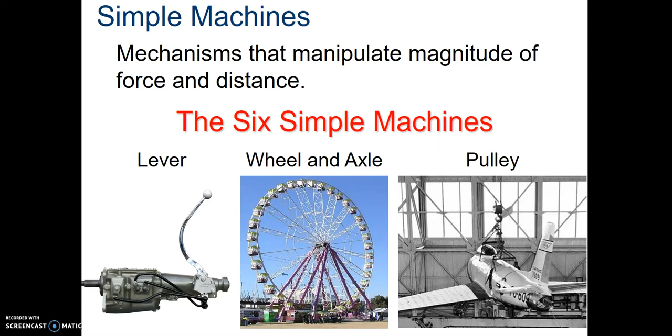There are 6 different types of simple machines. There's the lever, a wheel and axle, and a pulley, and there's also an inclined plane, a wedge, and a screw. Each one of these simple machines applies and has a mechanical advantage, the reason why we use them and what they do inside of a system.

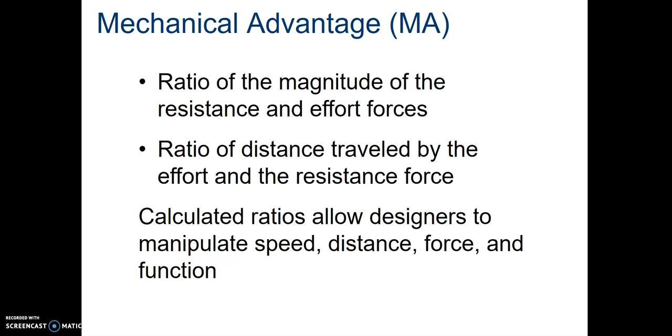Mechanical advantage itself is either a ratio of our forces or a ratio of the distances. So the ratio of the magnitude of the forces, how much force is being applied, so 10 pounds, 5 pounds, 20 pounds, 100 pounds, and then the distances, 5 inches, 10 inches, 20 inches, 30 feet, 50 yards, whatever we're looking at. And we use all of those different ratios to figure out how well a machine works and what we can do to edit and change it to get what we're trying to accomplish completed.

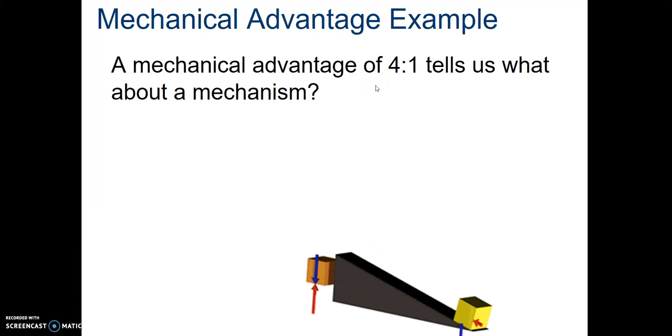So let's look at an example. Mechanical advantage is 4 to 1. What does that tell us about this mechanism or simple machine? Well, it tells us something about the forces. The force to push this box up this hill is 4 times less than the force it takes to lift this box straight up. So it takes less force to move it up if we push it across.

But what does it tell us about the distance? It tells us that this distance is 4 times bigger than the distance straight up and down. So it takes less force, but it takes a greater distance. And force and distance are talking about work.

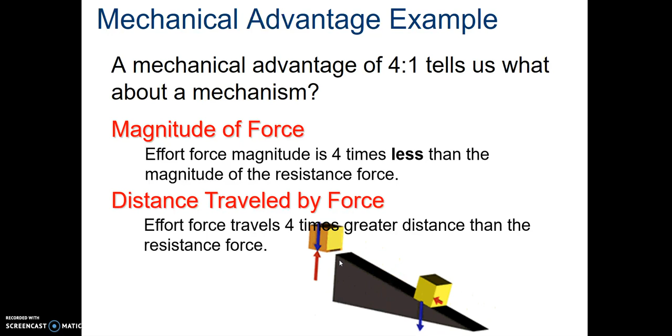Work is the force applied to an object times the distance it travels. So in order to move that box on the previous slide, we still needed the same amount of work whichever direction we took it, but it just meant what's our ratio of force to distance that we wanted to travel. So work is force times the parallel distance.

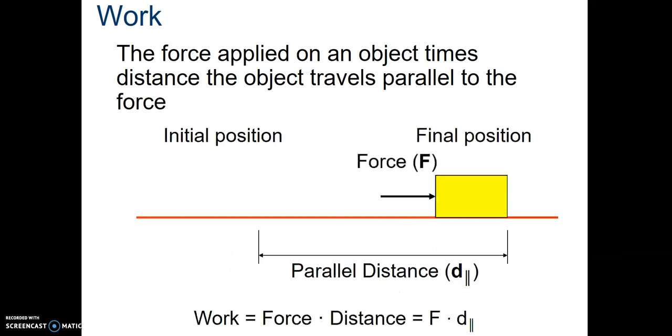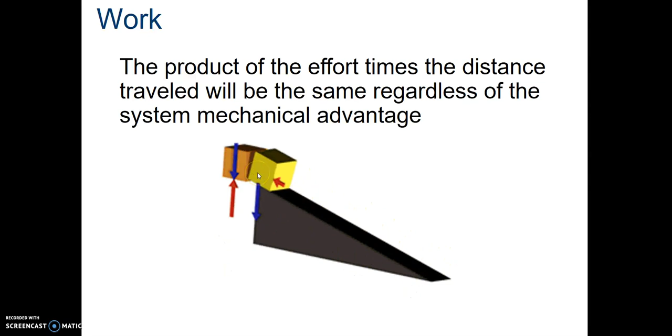So work is the force times that distance, for each case. Both of those have the same amount of work to get those 2 blocks to the top of that ramp. So both those examples present us something different. So it has a magic number with it, which we call mechanical advantage.

Mechanical advantage greater than 1 means it takes less effort force to overcome the resistance force. So that hill was a perfect example. It took less effort to overcome the force of that block to move it.

Another example of mechanical advantage greater than 1 is a wheelbarrow. You put 200 pounds of concrete in the wheelbarrow, and then you're able to lift up at the end of it using maybe only 100 pounds of force, and you can actually move that. So you can move objects around that you couldn't without using that simple machine.

The thing is, it takes a greater distance. So back to the wheelbarrow example, from the wheel, which is the fulcrum, to the load, or the concrete, is a shorter distance than from the wheel to where your hands are.

So, if your hands are further away from the fulcrum, it takes even less force. The closer your hands are to the actual resistance, that concrete in the middle, the more force it takes you to work with. And that's what we'll discuss in the next couple of slides and presentations.

You can also have mechanical advantage less than 1. Mechanical advantage less than 1 means it takes more force to overcome that resistance force, but less distance. Examples of mechanical advantage less than 1 would be tweezers or chopsticks. If you've got a set of tweezers, you've got the fulcrum at the end where the things are connected. You've got the force you apply in the middle, and then you have the little splinter you're trying to get out of your thumb.

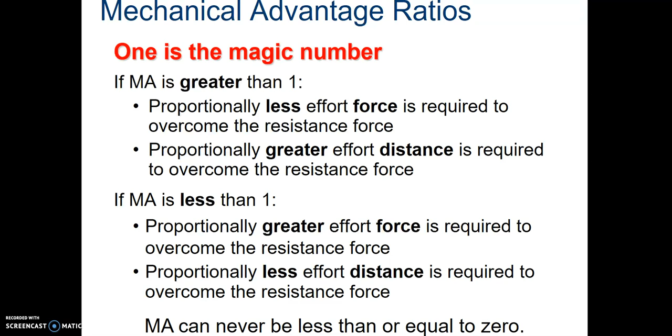So, one thing we've got to know: mechanical advantage is never less than or equal to 0. So if we get something less than or equal to 0 in our calculations, we know we did something wrong. We go back and try to fix that.

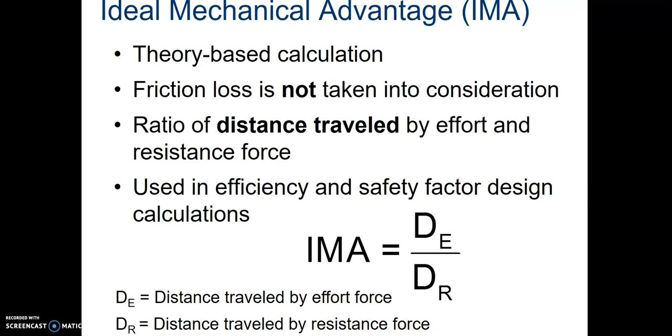So we've got ideal mechanical advantage. Our ideal mechanical advantage is theory-based. So we're not talking about friction being lost when we try to move something. We're just looking at the distances traveled. So whenever we see two distances, we think IMA. All we've got to do is take the distance to the effort and the distance to the resistance and divide those two. It could be distance from a fulcrum, it could be distance from whatever we're looking at, but with our two distances, we're able to divide those and calculate ideal mechanical advantage.

If we're ever given two forces and are looking for mechanical advantage, we're going to solve for actual mechanical advantage. Actual mechanical advantage means we're thinking about the friction. There's a little bit of friction loss that's taken into consideration when we're actually applying forces on things. So we're looking at the force magnitude: force of resistance and force of effort.

So if I'm trying to lift that 200 pounds of concrete, that's my resistance. I can apply 100 pounds of effort to lift that. That means I've got 200 divided by 100, an actual mechanical advantage of 2. So whenever I have forces and I need a mechanical advantage, I solve for actual mechanical advantage. Those are just examples and key terms that will bring us forward as we look at different types of simple machines and what they do for us.